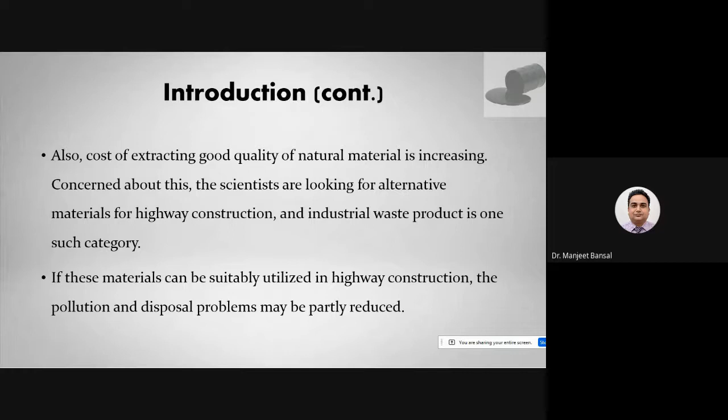Now, as far as roads are concerned, majority of you are from civil engineering side, I assume. So all of you might be knowing, when any type of road is constructed, that road may be MDR (major district road), or ODR (other district road), or under Pradhan Mantri Gram Sadak Yojana, or district roads, state highway, or national highway.

So any type of road when we construct, that involves basically compaction of different layers in all types of roads. It may be compaction of soil layers, it may be compaction of aggregates. So all types of roads involve compaction of different materials.

As far as these conventional materials are concerned, which we are using in road construction, like soil, stone aggregates, sand - these are the conventional traditional materials which we use in highway construction, involving soil, stone aggregates, sand, bitumen, cement.

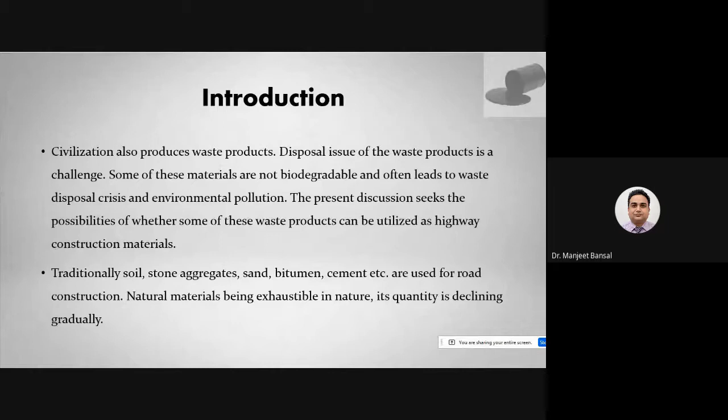When we use all these materials, we conduct a number of tests to check the suitability of these materials for highway construction.

Different types of tests are performed according to the requirement of the roads, like permeability, volume stability, strength, hardness, toughness, fatigue, durability, viscosity - so many parameters, because all are related to the strength and durability of the pavement or road we are constructing. For which purpose we are constructing, that purpose should be served. So we conduct these various tests to check these properties to check the suitability of all these traditional materials for road or highway construction.

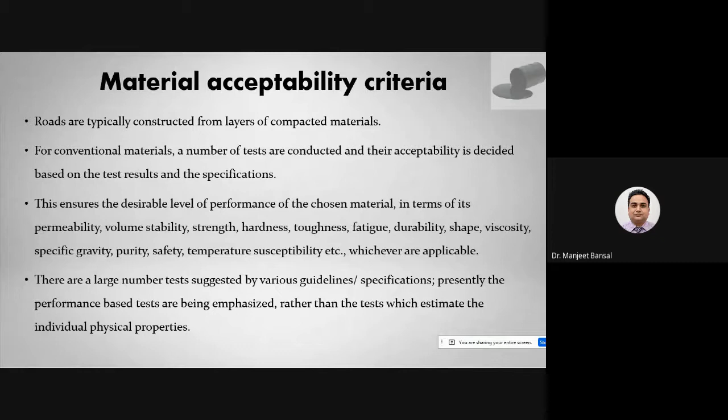Now, when we talk about the waste materials which we can use in highway construction, naturally we have to go for various tests for all those waste materials which have to be used in place of the conventional traditional materials in highway construction.

But we cannot apply all those tests which we use on conventional materials to check suitability for road construction, on the waste materials. It means we have to devise new tests which we can apply on the waste materials to check their suitability for highway construction.

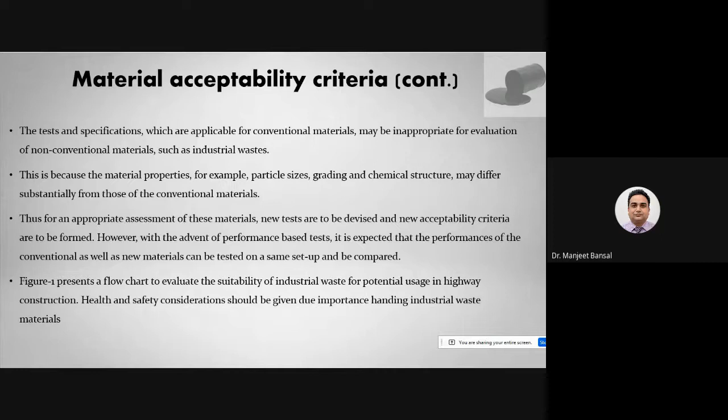So in this series, we had made a flow diagram, a flow chart, to check the suitability of waste materials in highway construction. This flow chart is self-explainable, showing that when we start from a new material, we will go for physical or chemical processing.

We will go for physical or chemical processes, then possible highway material. After that, we can say we come across whether this waste material can possibly be used in highway construction as a highway material.

Then after that, we will assess with respect to safety and health issues. We will check that the waste material is not hazardous, that it is safe. Similarly, if we are using it in highway construction, there should not be any health issue for the persons involved in the construction of highways.

We will check that, and if that waste material passes through the safety and health issue, then we check whether the conventional test procedure is applicable. If yes, then we will go for those conventional tests which we have already discussed.

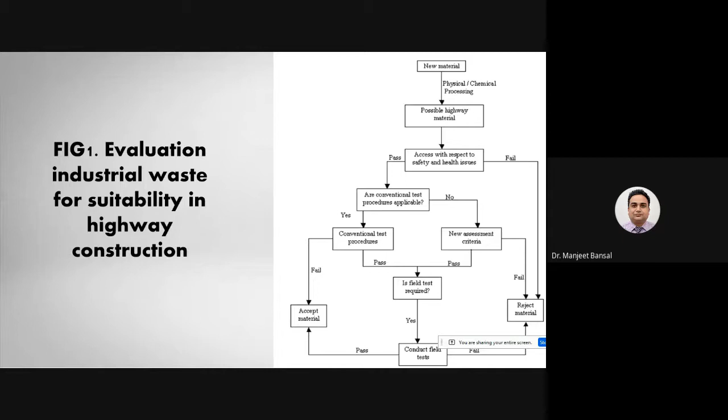If not, then we accept the material, otherwise we conduct field tests according to the requirement. Similarly, if that waste material fails in comparison with safety and health issues, then we will go for rejection of the material. So this flow chart explains how waste materials can be used or tested for checking suitability in highway construction.

Now, the next discussion topic comes - types of recycled materials in use.

Before we start this series of lectures, I will explain something in brief. First of all, you should know what are the different steps for construction of a national or state level highway.

First we prepare the subgrade, the soil which we compact, just like we prepare the foundation when we construct a building. We prepare a subgrade by doing proper compaction in different layers, and the thickness of that subgrade varies from type of road, but in broad sense it is approximately 500 mm, meaning half a meter of subgrade is prepared.

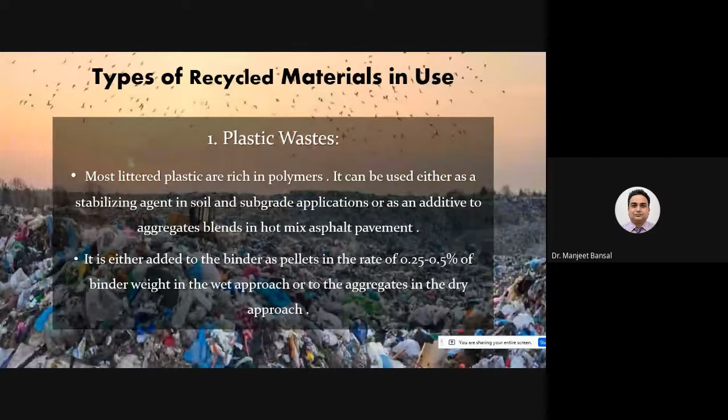Now, types of recycled material in use. In the background you can easily see the picture of different types of plastic waste. These can be used as a stabilizing agent in the soil. Similarly, as subgrade applications also, that can be used. Clear?

That is also a type of waste material. One more term used here is HMA, hot mix asphalt. So these are the terms we are using in this slide. To repeat: HDPE is high density polyethylene, a thermoplastic polymer made from petroleum. LDPE is low density polyethylene, a soft, flexible, lightweight plastic material with good chemical and impact resistance, easy to fabricate. HMA means hot mix asphalt.

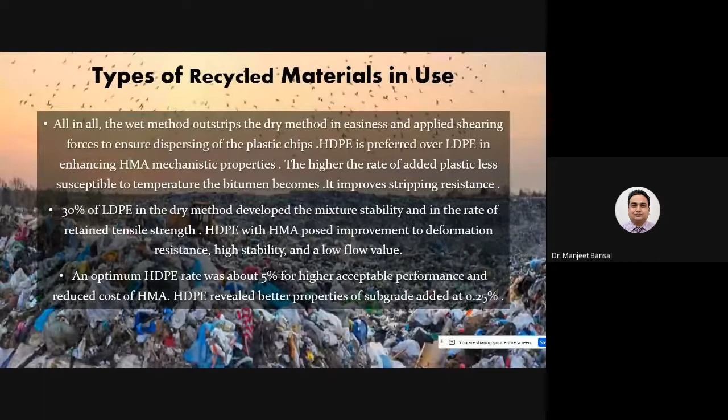So, types of recycled materials in use: RPP, recycled plastic pins. These have also been used in stabilizing embankments.

Now in this slide, we are using one more term, that is CIPR. What does CIPR mean? Cold in place recycling - CIPR means cold in place recycling as a pavement rehabilitation and stabilization technique with cement. This CIPR improves road surface with minimum expense. This CIPR technique is used for rehabilitation and stabilization of existing roads. This is basically CIPR, cold in place recycling.

It is a method of removing and reusing the existing asphalt surface. It involves grinding off the top 2 to 5 inches of existing asphalt surface and mixing the crushed asphalt with an asphalt recycling agent. Now I will explain further.

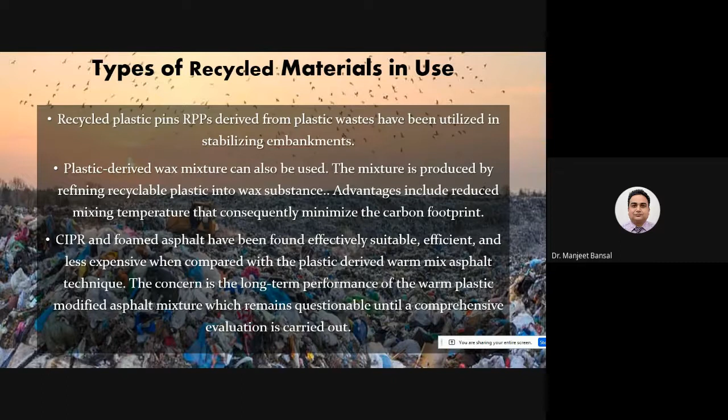Further, nowadays we will discuss recycled asphalt shingles. Can anybody tell what asphalt shingles are? We already discussed in CIPR that it is a method of removing and reusing the existing asphalt surface, involving grinding off the top 2 to 5 inches of existing asphalt surface and mixing crushed asphalt with an asphalt recycling agent. So can anyone tell what asphalt shingles are, and how these are being utilized nowadays? Basically, when we make a new pavement, these asphalt shingles come from the existing road surface.

Nowadays, milling machines are used. It's a type of machine that grinds the existing road or pavement surface. With the help of this machine, the existing road surface is ground off, and the small pieces are utilized in the construction of new roads.

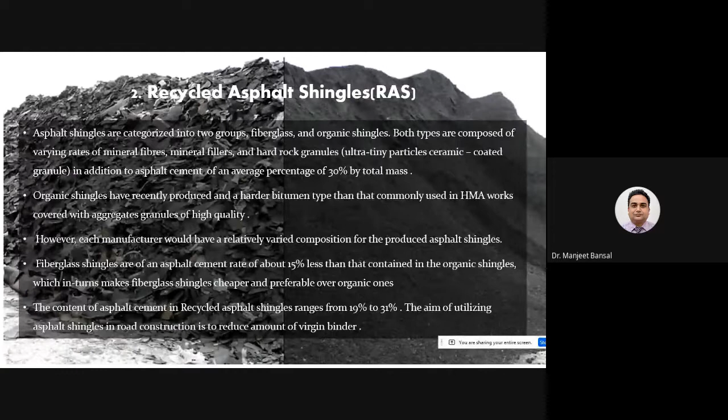So again, using these recycled asphalt shingles serves two purposes. One is the waste material is utilized. Second is we get improved pavement surface properties. This is how we can use this.

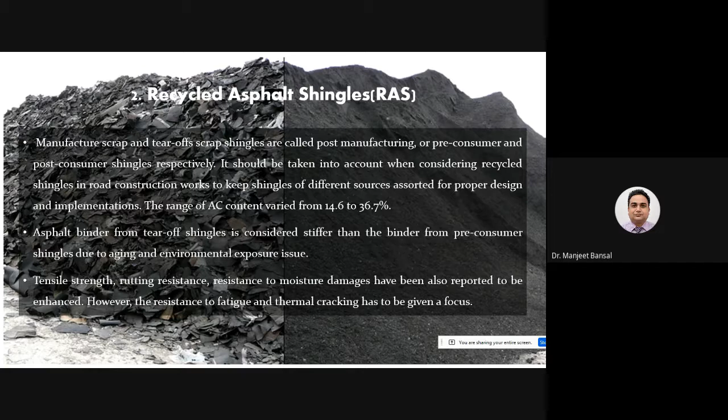In this slide, different quantities and types of shingles are shown, which we can use based on their different properties. It says we can use up to a maximum of 5% of the total weight of the mixture for recycled asphalt.

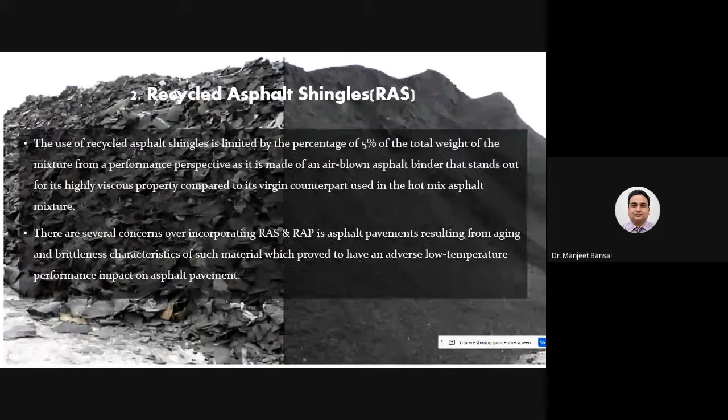These slides explain in a broad sense how we can use recycled asphalt shingles. We generally use it in a 5-step process. If we take the 5 steps in construction of national highways or state highways, then in the 4th step, where we lay down DBM or BM on the base course, we can utilize these recycled asphalt shingles.

The use of this RAS in new highway construction serves two purposes. One, the waste materials generated from grinding the old pavement will be utilized, and second, we get good quality pavements because the bitumen content in the new pavement will be improved.

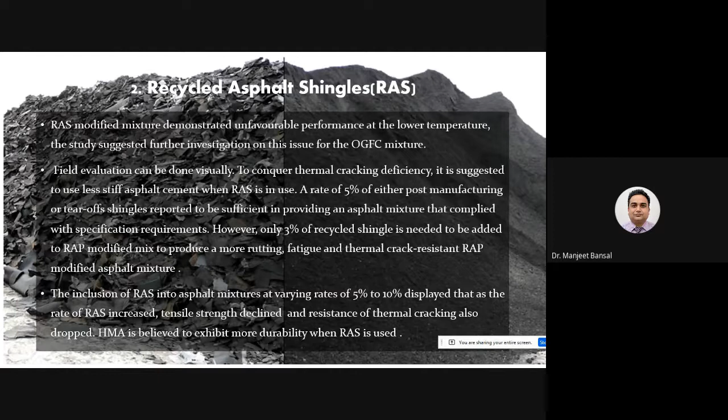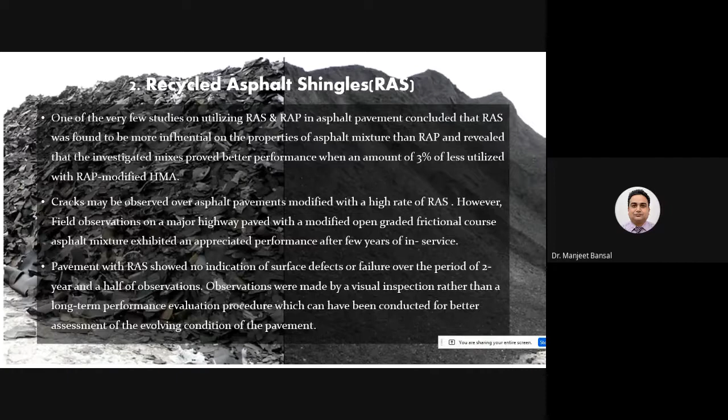This is something about recycled asphalt shingles. Now the next type of waste which we can use in highway construction is crumb rubber scrap tires. Old tires used in automobiles or elsewhere become useless, so we can use those waste tires in asphalt surfacing.

What is asphalt and what is bitumen? I have already explained the basic difference. So if we are using crumb rubber or scrap tires, we will get improved resistance to skidding when used in highway or road construction.

It also provides the asphalt mixture with high shear strength, which is favorable in withstanding imposed traffic load and preventing the occurrence of rutting. Similarly, in cold weather conditions, we get good resistance to freezing and thawing cycles.

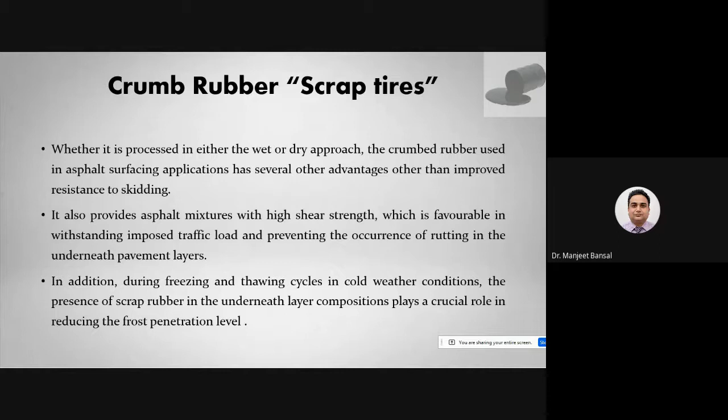So if we are using these scrap tires or crumb rubber tires in pavement construction, in asphalt, we again serve two purposes. One, we are utilizing the waste material, and second, we get improved properties of the new pavement, like improved resistance to skidding, and better resistance to freezing and thawing.

Some other benefits of using crumb rubber tire waste in road construction is that we get improved stripping resistance on the pavement side. When added up to 30%, significant improvement in properties like weathering and stripping resistance has been achieved. So this crumb rubber scrap tire waste material, if used in highway construction, serves waste management purposes as well as improves the properties of the new pavements we are constructing.

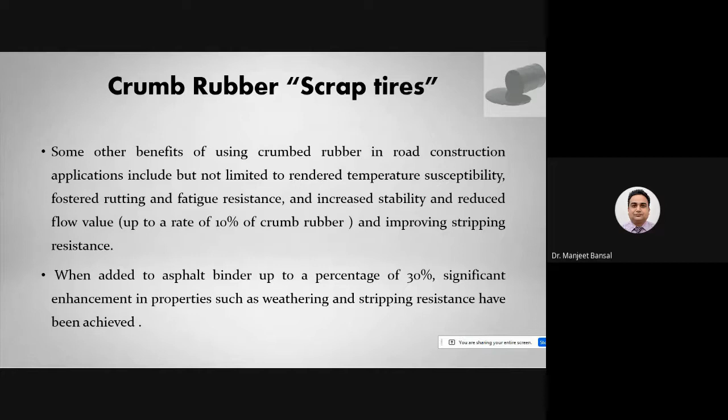The third waste material which we can use in highway construction is foundry sand. First question: from where do we get this foundry sand? Basically, foundry sand is a byproduct of ferrous and non-ferrous metal casting industry, and it is classified as a fine grained material, consisting of high quality silica and considerable cleanness.

So this sand is reused at the foundries many times.

Basically, this foundry sand material has been utilized in hot mix asphalt, HMA. This foundry sand is also used similarly in subbase, embankments, and backfill materials.

We can use this foundry sand up to a maximum of 15%, according to various research done by different scientists throughout the world.

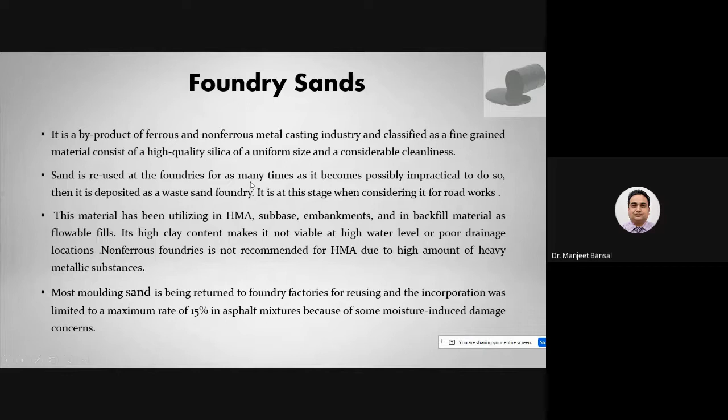But sometimes it is not recommended for subbase because of some environmental problems. Various researches by different scientists throughout the world have shown that 5 to 15% of the waste in subbase did not alter OMC (optimum moisture content) or MDD (maximum dry density).

One more term here is CIPR, which we have already discussed. CIPR means cold in place recycling. Basically, this CIPR is a method of removing and reusing the existing asphalt surface. It involves grinding the top 2 to 5 inches of existing asphalt surface and mixing the crushed asphalt with an asphalt recycling agent.

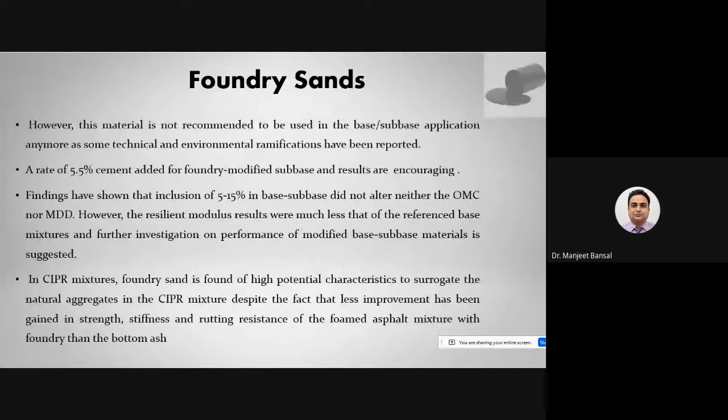So we can also use this foundry sand as a highway construction material in this process. Utilization of foundry sand in highway construction solves the purpose of waste management, and also improves various characteristics of the new pavement constructed with the help of foundry sand.

Then the next waste material which we can use in highway construction is coal combustion products, which can be used as supplementary cementitious material.

These coal combustion products include fly ash. Fly ash is an end product or waste product generated mainly from thermal power plants, which generate electricity based upon coal. When coal is burnt, electricity is produced with the help of turbines, but the end product of coal when burnt is fly ash, which is also a big waste disposal problem.

So coal combustion products include fly ash, boiler slag, bottom ash, pond ash - all these are coal combustion products used as supplementary cementitious material. This slide also shows RAP, reclaimed asphalt pavement. These different types of waste can be used in different percentages as shown by different researchers throughout the world.

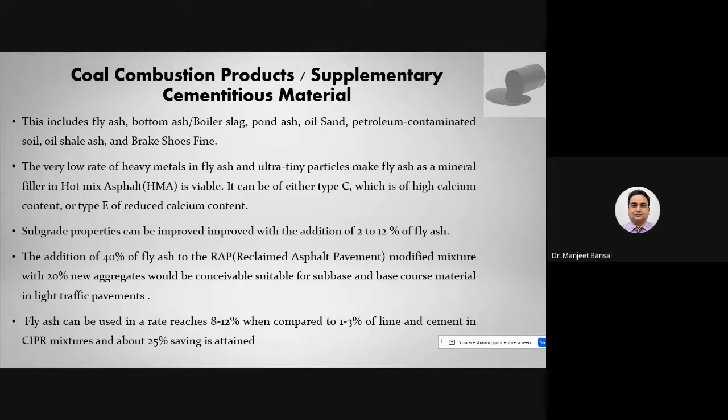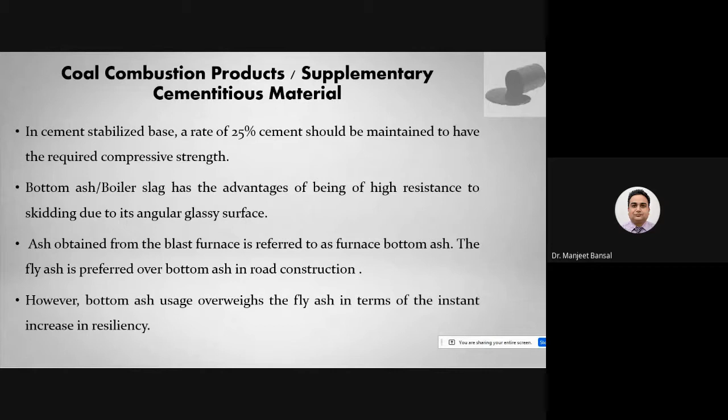This slide again shows various types of coal combustion products and how we can use them in cement stabilized base in different percentages, according to various research done throughout the world.

This slide shows how we can utilize ash, like pond ash, in the construction of highways, or how it can be used for compaction and filling. All these things are explained here - how we can utilize coal combustion products, which are treated as waste materials, in our highway construction to be used as a supplementary cementitious material.

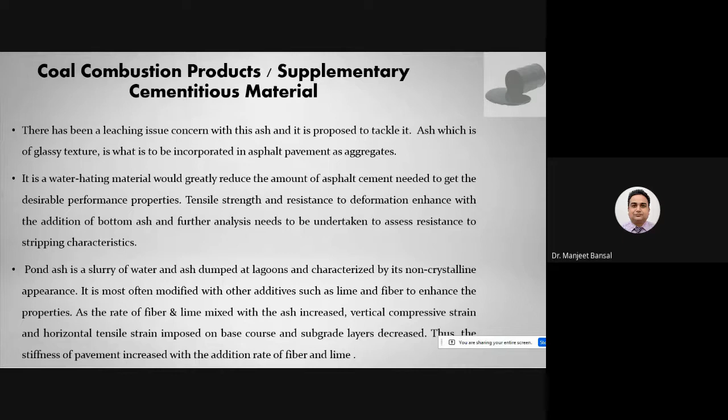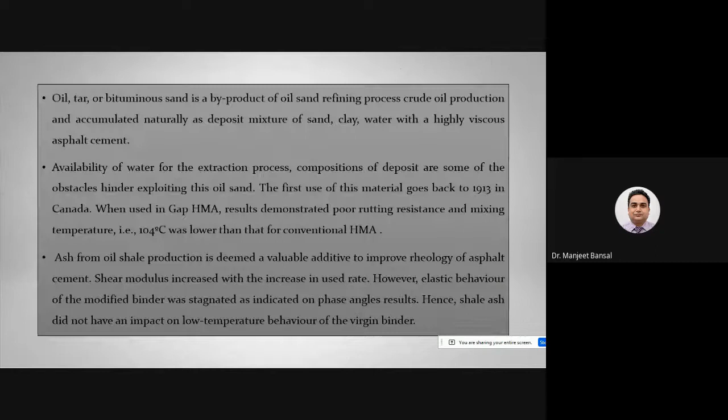Similarly, in this category comes your oil, tar or bituminous sand, ash from oil shale production. Because if we talk about coal combustion products, different types of waste come. This slide explains how in different categories of waste, we can utilize these in highway construction at different stages, right from the subgrade, then side filling, embankments, all these. So these different types of coal combustion products can be utilized in highway construction.

Now the next thing comes RAP. RAP means reclaimed asphalt pavement. I have already explained earlier what RAP is. HMA is hot mix asphalt. RAP is reclaimed, as the name indicates, reclaimed asphalt pavement. So the rate of utilizing reclaimed asphalt pavement in HMA, that is hot mix asphalt, is as low as 8% of the total recycled material.

So basically this comes in the category I discussed earlier, that when we are grinding the old surface, the old pavement, the milling machine that is grinding that utilizes that waste material. So the same thing comes here in this case also.

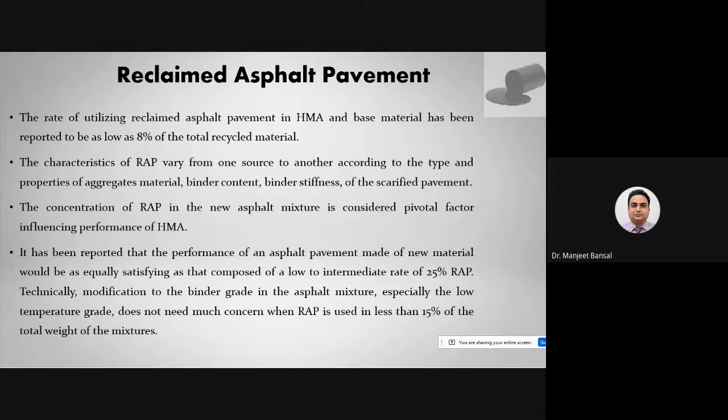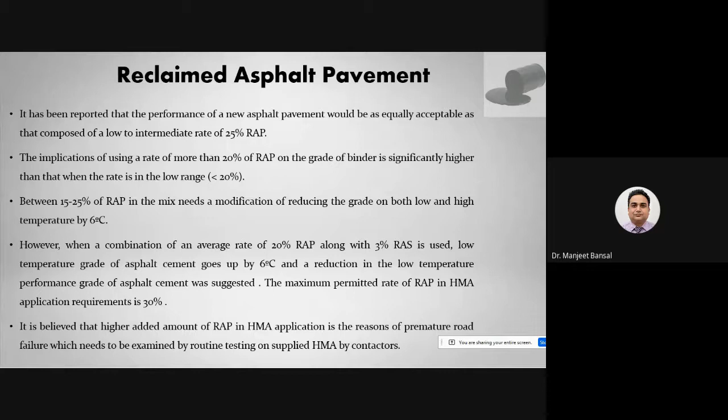This slide again shows how different types of waste, or in case of reclaimed asphalt pavement, are used at different stages in HMA, hot mix asphalt, and other things. This percentage and these categories are taken from data done by various researchers and scientists doing a lot of research in highways throughout the world.

So as far as demand rate of construction material is concerned, it is higher than the rate of generating and recycling. As we discussed earlier, demand is higher. There are two terms, demand and supply. So there is a gap between demand and supply - demand is more, supply is less. We have to fill that gap, and that gap can be filled when we provide some alternatives. So in this whole discussion, we are trying to provide some alternatives in the form of different types of waste which can be utilized in highway construction. So this demolition waste seems to be a viable option for road construction.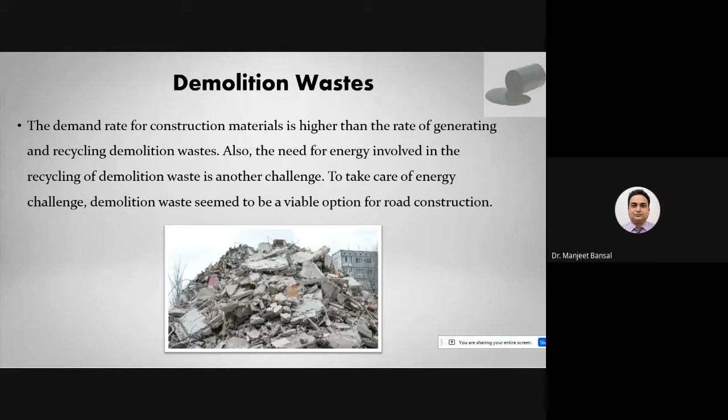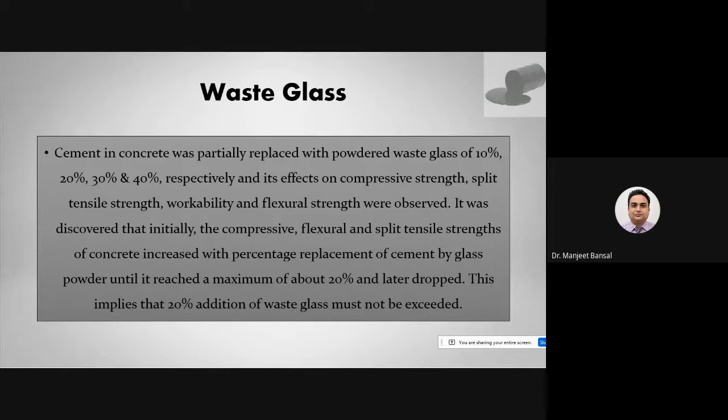Then waste glass - if we are demolishing a bigger structure, a civil engineering structure, or sometimes glass structures, then we will get this waste glass also. Various researches done by scientists throughout the world show that this waste glass can also be utilized in different percentages in highway construction.

Then another waste which we can utilize in our highway construction is slag waste. Slag waste means - first of all, you might be knowing from where we get the slag. Steel slag has been found to expand. This is available in steel rolling mills when we manufacture steel, all these. Various researches show that this slag waste can also be used in highway construction.

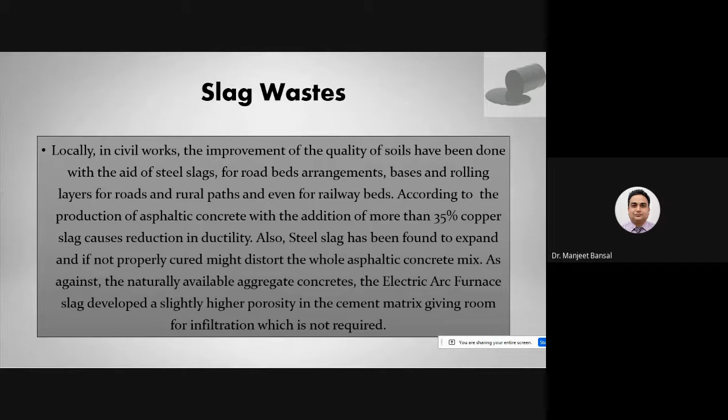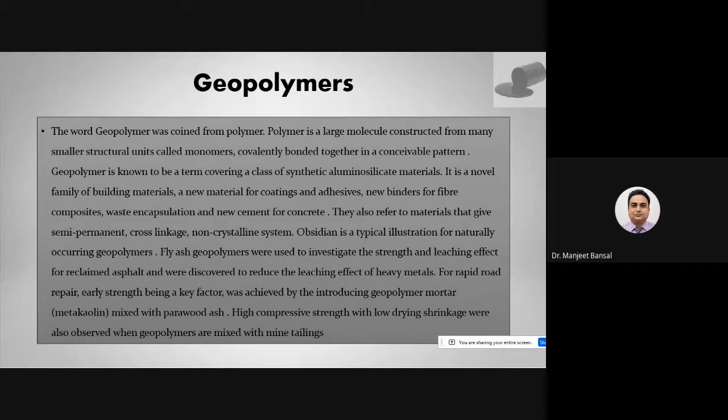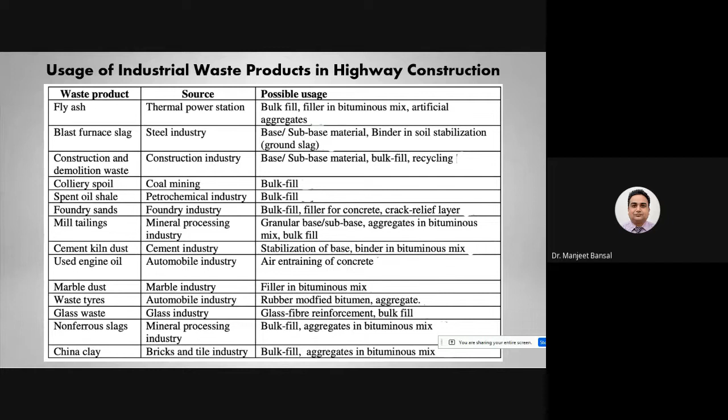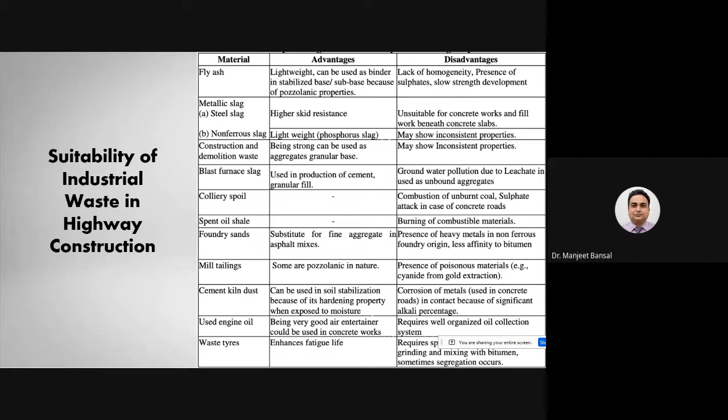This slide shows suitability of industrial waste in highway construction. These three columns explain how industrial waste can be used: material, advantages, and disadvantages. The materials are fly ash, blast furnace slag, and others, showing how we can use them in different stages of highway construction, and what the disadvantages are, clearly shown on screen.

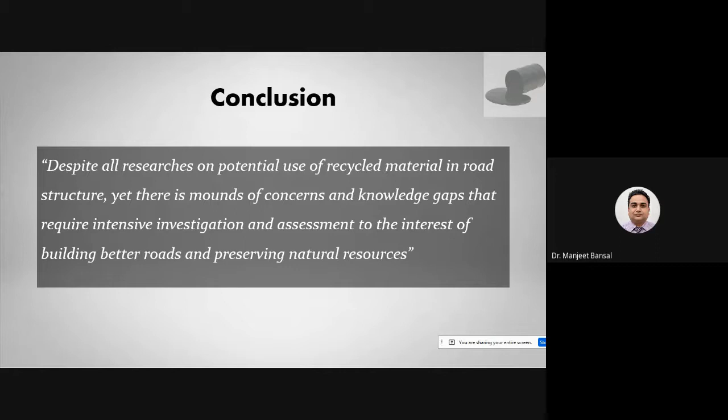So lastly, we come to the conclusion that despite all research on potential use of recycled material in road structure, there are still mounds of concerns and knowledge gaps that require intensive investigation and assessment in the interest of building better roads and preserving natural resources. A lot of research is going on regarding how we can utilize industrial waste in highway construction.

A simple, practical live example: when an important road is constructed, I explained to you the 5 stages of road construction. In that, the existing bitumen road is ground with the help of a milling machine, and the small chipped parts are used in the new construction of the pavement.

An example of this is the Bathinda-Chandigarh new national highway, which is a concrete road, a rigid road, but in some parts or pockets, flexible bitumen pavement is used instead. One reason is that they have to grind the old bitumen pavement, so that waste material needs to be utilized. In reality, this waste product in the form of asphalt shingles is used in new pavement construction using the milling machine, at the 4th stage of highway construction, which is the D-BM or BC stage.